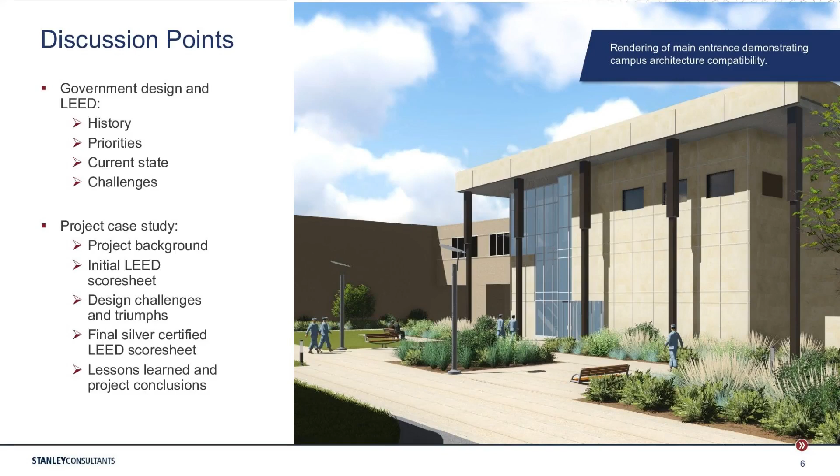And finally, we're going to go through those lessons learned and project conclusions and some food for thought when you're at the beginning of a project with similar difficulties to maybe help you get there a little faster. With that, I'm going to turn it over to Jessica to review the sustainability side of the presentation.

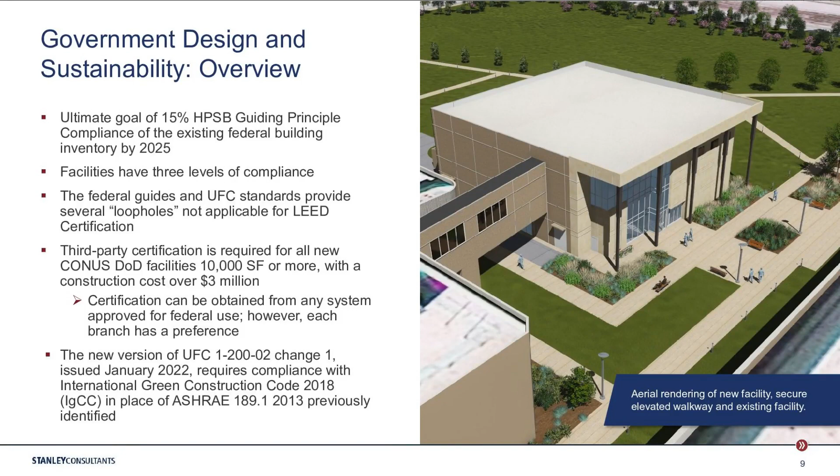So in the latest version of the UFC 1-200-02, with change one, which was issued this past January, the bar has kind of changed. There aren't a lot of substantial differences, but we have changed to complying with the International Green Construction Code 2018 version in place of ASHRAE 189.1, which was the previous benchmark.

The great thing about this is that the IGCC was created by several industry groups. The AIA, the U.S. Green Building Council, the International Code Council, ASHRAE, and the IES were all involved in this joint initiative. So it brings together a lot of stakeholders that have common goals of creating a sustainable indoor environment.

And with that, I'll pass it on to Jennifer to talk about our case study. Thanks. Yeah, thank you, Jessica.

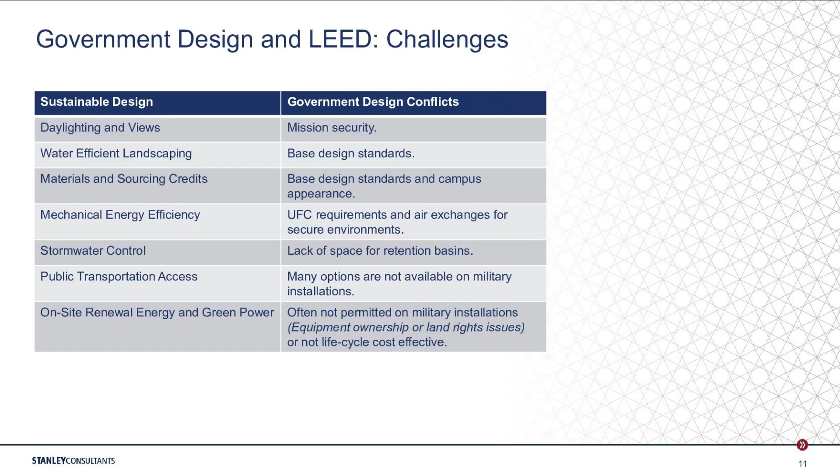And so it really came down to a lot of different contracting issues and things like, whose fund does this come from? Questions that really made this a difficult credit to even try to go after, even if the base was interested. So with that, I will introduce the project.

So this one, it's starting to get a little bit dated, but it's still a great project reference that I constantly go back to. It has a lot of unique qualities to it that we can use and evaluate on different projects. It was an administration facility. The scope of work was to provide a brand new building, but it was considered an addition because we were tying to an existing building. Design originally began April 2015, and construction was completed in February of 2017. And the total construction cost was around $13 million.

We were really watching the sustainability and the mission requirements. The new facility was designed for 73 full-time equivalent occupants. You'll see that acronym as FTE in the LEED guides. And it was designed as a squadron command and administration support staff facility. Their existing facility was overcrowded. They had no flexibility to be able to rework the space.

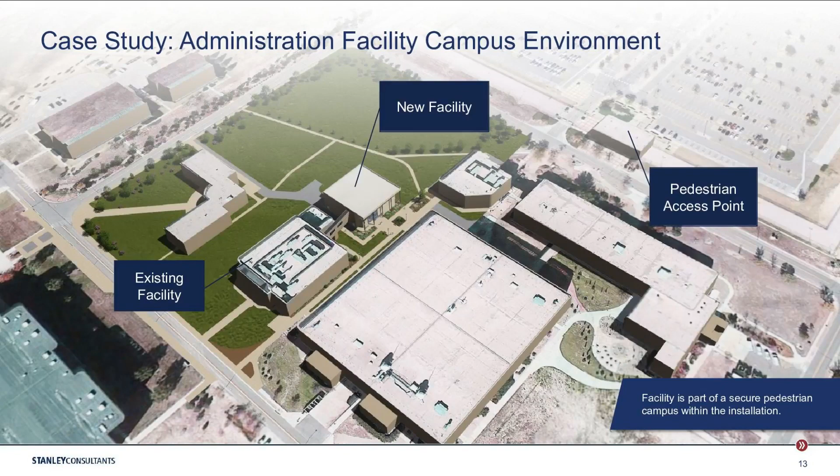So we really had to pay attention to how our utilities came into the building and how they fed and worked between the secure perimeters, because we couldn't have the first floor touch the second floor. They had to be two separate secure areas. And so we had to work through how those utilities ran between the buildings and how they connected on the walkway.

One of the reasons, too, for this walkway is that the people who were occupying the new facility were also working still in the existing facility. And so they wanted these people to be able to badge in and badge out without having to go outside and go through the full security protocol. They could just go through a card reader. So there was a lot of coordination with the existing facility heights and how our walkway aligned on the site and where it could enter the building.

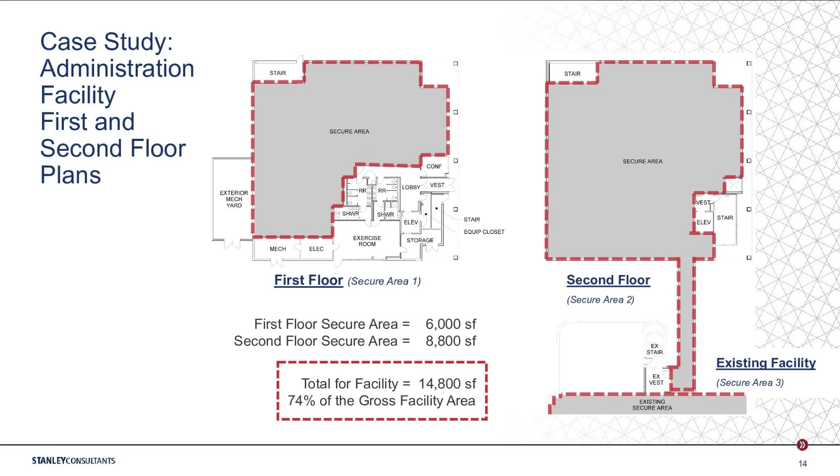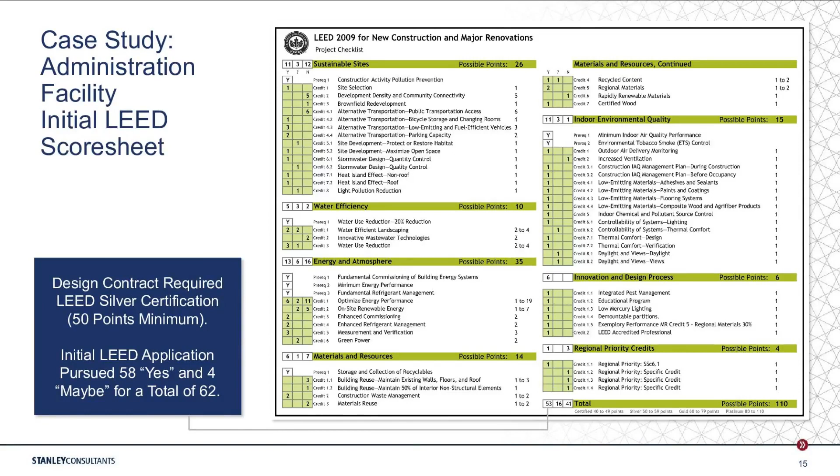Some of the things as we were going through design that just kept creeping up was the stormwater quality control was a big issue. This was again one of those sites where there wasn't a lot of space where we could put it down. And we really messed with where that LEED boundary fell.

We adjusted the site boundary that we set for all of our sustainability site credits based on how we could get not only our light pollution control, which I'll talk about in the next point, but also our stormwater quality control, and make those two credits align. And it was a very difficult process. I thought my civil engineer was going to kill me by the end of the project because we kept switching stuff up on them.

But another issue was also the ATFP requirements that we talked about earlier. If you've ever looked into that UFC in depth, there's a lot of limitations for depth of plantings or even standing water on the site. Like, you don't want to have somebody be able to conceal something where you can't inspect. And so it really limited what we were allowed to use for retention basins or how we were allowed to deal with that stormwater. So in the end, we ended up using a sand filter detention basin and grass swales. And we were able to meet that zero post-development discharge, removing all total suspended solids.

So that was a huge triumph for the team. We did not think going in that that was going to be possible. We thought this would be a partial credit for us, and we ended up taking it across the finish line and beyond.

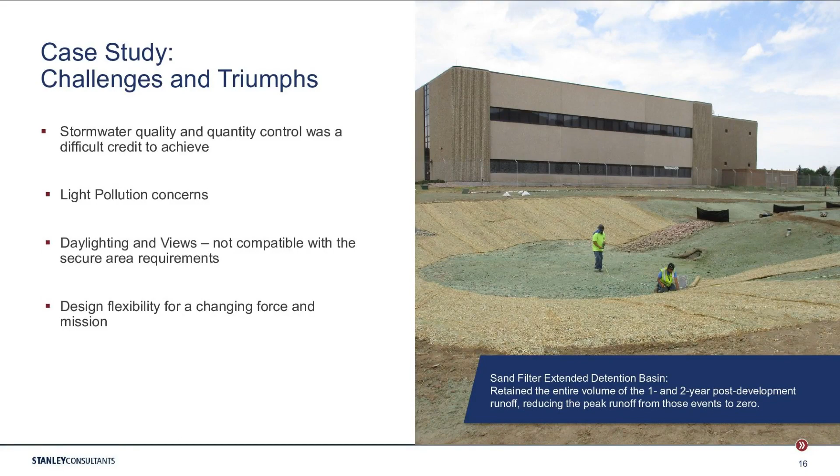So some additional items. This is always the running joke if you've ever done a LEED design: where's your bike rack? I don't know how many of you have run into that. It's one of the easy credits to get. You just put a bike rack out front and add a couple showers and the box is checked. It's usually pretty easy to work into your program. What made it more humorous on this site is because it's a pedestrian only campus.

They couldn't even bring bikes into it. But because it was LEED Silver, that was a box we could check. It effectively became called the sculpture at the front entrance, and we put a nice little bike rack. This is one of those issues with sustainability that, okay, it's on the checklist, let's do it.

Does it really meet the design intent? Is it something that is really making the environment better if you're not using it? So it's one of those that as you go through projects, you try and do your best, but in this case, we put a sculpture in.

So the other issue, as I spoke of before, we are part of an existing campus. They already had set exterior materials. So when trying to get that 500-mile radius for obtaining all of our construction materials, or at least a mass majority, when your whole perimeter wall is precast panel, that's really hard to do if your precast and aggregate is not coming from within that 500-mile radius.

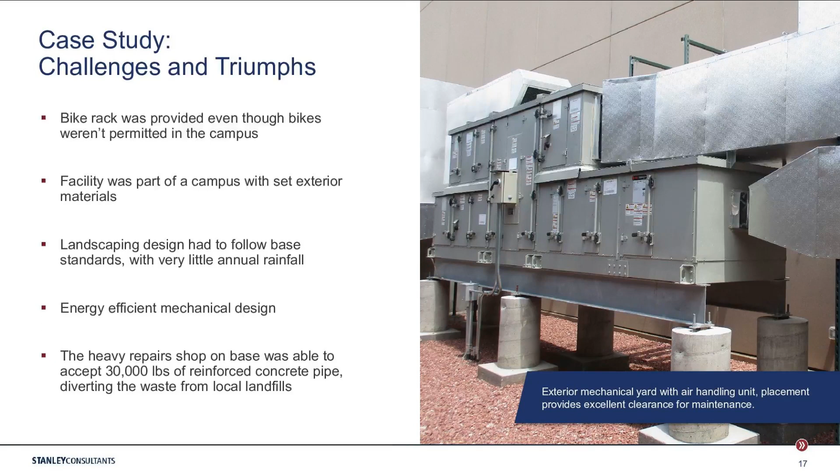And we found out that they were able to accept 30,000 pounds of reinforced concrete pipe. And that allowed us to divert all of that from the waste in local landfills. They were able to reuse that in whatever it was they were working on. So that helped us above and beyond on that credit as well, that we never could have anticipated if we hadn't spoken with local base groups.

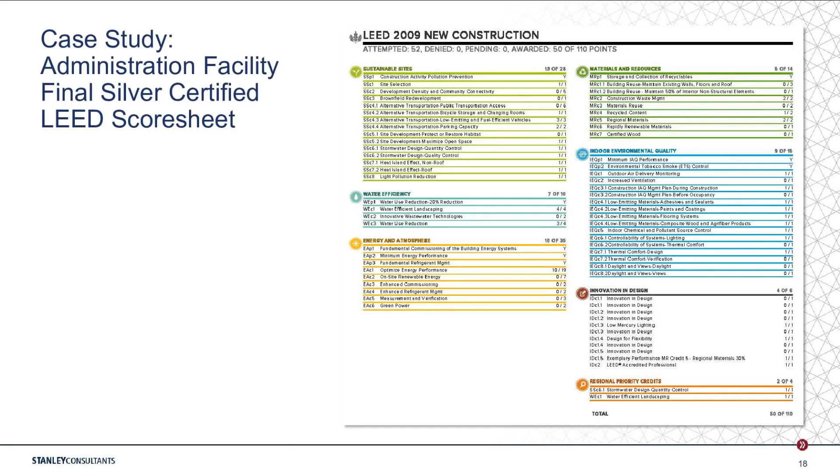So in the end, I know the chart's really small, but this is our final construction credit that we received from LEED, and we hit that 50 point. Being a design build, we hit that 50, and there was no reason for us to keep going. There was no glory, if you want to say it that way, in trying to get as much as we possibly could. We just were trying to meet that minimum credit for this requirement.

Some of the high level ones was the storm quality. So that was our sand detention basin that we had originally planned as a maybe credit and ended up moving that to the yes column. So that gained us a point. The light pollution credit, where we were really concerned about base security not letting us do certain things, that was a maybe credit for us in the beginning, and we were able to achieve that 1 point.

The water efficient landscaping, it's ultimately a 4 point credit, or it used to be under LEED 2009. And we had 2 yes and 2 maybe points that we tried to go after. And in the end, after working with the base CE unit, we were able to jump that and get all 4 points. So that was a +2 major win in our box.

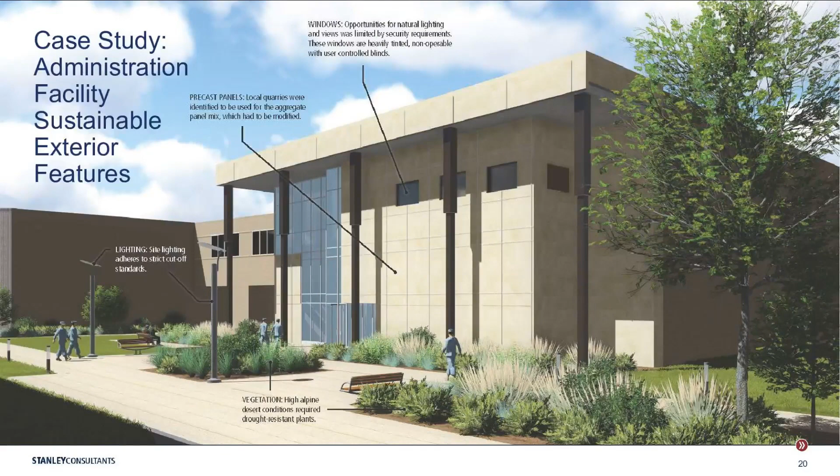And then we also have the lighting that you see along the walkway that's pointed out. They were diffused lighting that reflected down instead of up into the air to try and control that lighting cutoff. And then finally, you see the vegetation, the different types that were put in there, local grasses and swales, and some trees, but very minimal. It was more bush size, kind of just adding to that pedestrian environment.

So finally, just to gloss over some lessons learned as we were going all the way from design through construction. You can still have a very sustainable building and still meet the design intents that these building codes and these organizations are really pushing for to create this better planet for us all. It's not easy. You have to want to do it. Really, I think in a lot of ways the codes write it so you can have these cop outs and these, oh, that doesn't apply. And I've been guilty of using them myself.

But really, in the end, it's trying to make that extra push to make that environment and still design a building that is easy to maintain and works for its end users and its final function. Really, what helped us out a lot was planning for ample stretch credits or backup credits, things that we don't think we can get, but we're going to try really, really hard before we say this is a no. As you saw, a lot of things that we gained or didn't decide to go after was because we gained stuff we didn't think we could get. So that's a huge planning thing when your team's looking at a project.

Really take a good look. Don't just glance through and check the boxes, think about it, and work together to see if there's a solution, because there might be one you're not thinking of. And that goes into creative thinking, alternative compliance. Are there ways that you can get this, follow the intent of what the code, the sustainability guide is trying to write, that could push a maybe to a yes? You may not do it the exact way they're saying, but maybe you can prove you're still meeting the intent and doing the goodness for the environment.